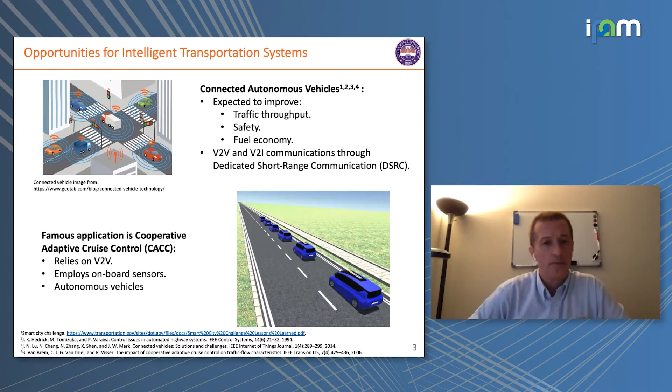What I'm going to talk about today is a little bit different from what we've heard so far, looking at connected vehicles from the point of view of security, and therefore resilience against cyber attacks. We know we have a lot of opportunity with connected and automated vehicles to improve traffic throughput, safety, and fuel economy. But if we forget, we also have potential vulnerabilities associated with the use of connectivity.

We focus mostly in this work on cooperative adaptive cruise control, but some of this activity has been extended by me and some of my colleagues into more general cases for distributed CPS, networked CPS.

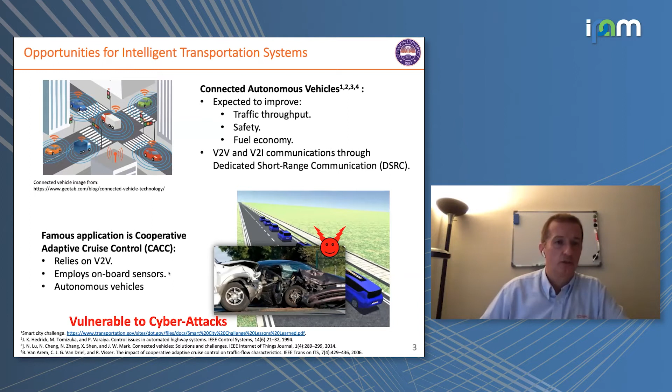There are several V2X applications being studied, for example for road safety: collision warning, collision avoidance, intersection warning; for traffic management: speed management and traffic information routing; infotainment; and also autonomous driving, to really control the vehicle from the point of view of fuel economy, braking, or cooperation with other vehicles to improve overall traffic flow.

Together with those benefits comes a whole set of security issues. There are several types of attacks that can be implemented on a vehicle network. In this work, I mainly focus on the ones associated with availability of the network, in particular jamming and denial of service attacks. In the past I've also done work in integrity and data trust, and you can find that work on my website.

There are sophisticated threats that can be implemented, and the problem is that cars are on the road and have to satisfy certain safety requirements different from other applications, such as in a computer network or an electric grid. People have tried to find solutions using more or less traditional approaches, but there are some key aspects that still need to be nailed down.

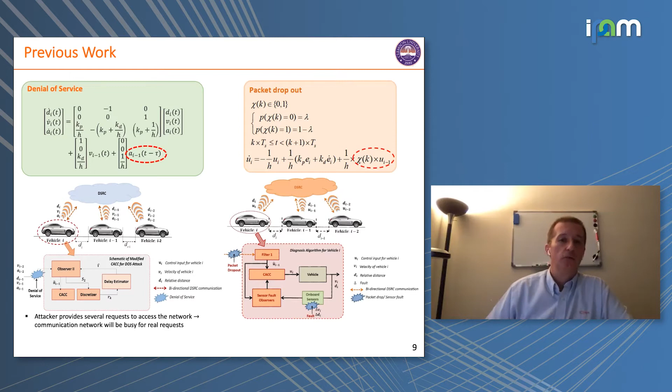For example, for the packet dropout we need the Bernoulli distribution, or we need to be able to estimate the delay in the case of denial of service, which in most cases are difficult to be met. So here, what I'm going to talk about is a different type of approach we have developed that is more sophisticated, utilizing hybrid modeling to address this problem in a more formal way.

I'll start first with the cooperative adaptive cruise control, the traditional approach, and a comparison with ACC.

In ACC, we just use information from the sensors without communication between vehicles. The objective is to maintain a certain relative distance from the vehicle, which depends on the headway timing constant H and initial potential distance R. The idea is to send this error to zero and possibly have a certain condition for string stability.

Now, in the cooperative adaptive cruise control, we have injection of information into the communication network. We are focusing on a particular scheme in which the preceding vehicle sends information to the following vehicle. There are several other schemes out there, but this is the one we mostly focus on, and it's one of the most popular ones.

The information sent in a V2V fashion is this u_{i-1}, the control action of the vehicle in front, sent through the network to the rear vehicle, in such a way that you can improve the control in the vehicle that is following.

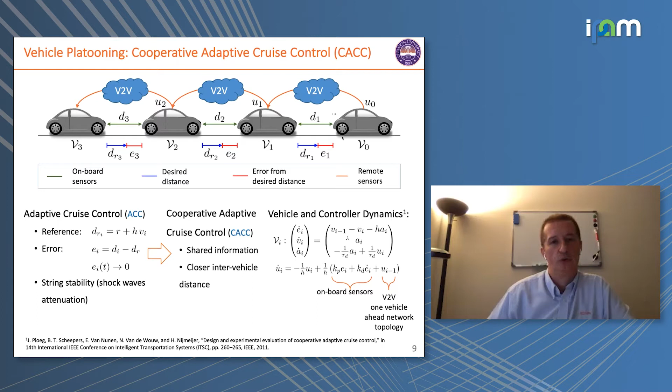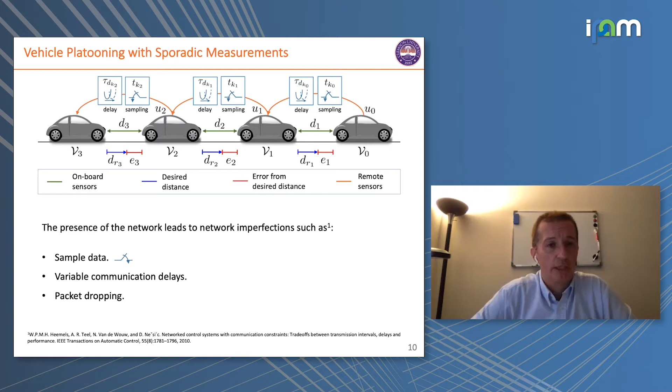Issues arise when we introduce phenomena typical of network communication, such that we can have delays or variable time sampling. This really makes things challenging, and the question is how can we deal with this phenomena in our model?

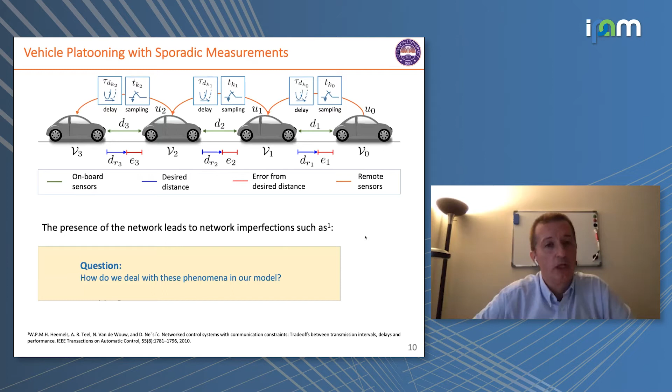Here is the way we model the problem. We make some assumptions on the variable transmission interval, bounded by the maximum allowed transmission interval, TMATI, and the network delay, also bounded by TMATI and the maximum network delay, TMAD. This ensures that the output is received by the controller before the next sample is sent.

What we basically do is model the system such that the whole platoon is considered as a cascade of dynamical systems. We want to design things such that we have both performance of each vehicle independently and also string stability.

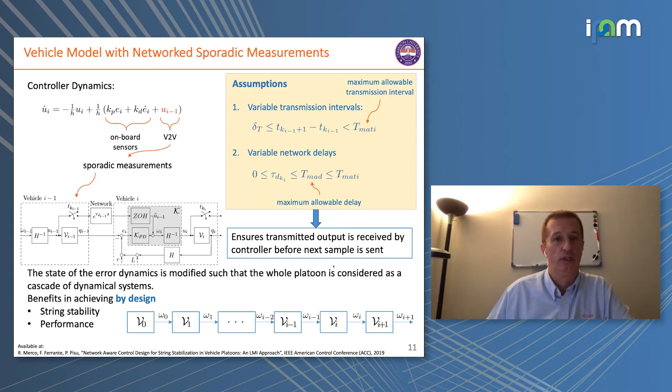So here is what happens: at a certain time step, say T0, the control input of the leader vehicle is sampled and a packet is created. The packet is then sent to the network, which has delays, and is received by the following vehicle, which updates the value stored in the zero order hold block. The system can then be represented as a linear system with jumps.

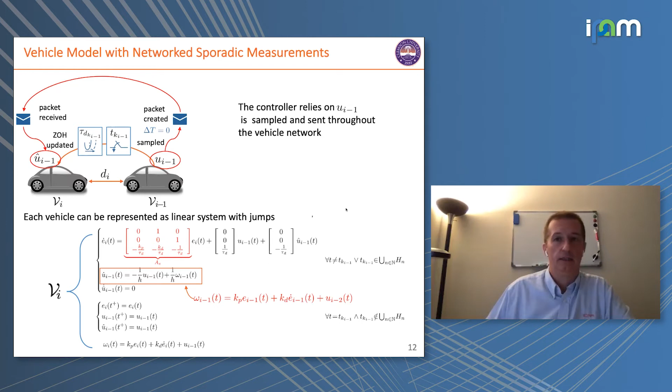It is clearly amenable to being described as a hybrid model.

In particular, we follow a hybrid system framework proposed previously by Goebel, Sanfelice, and Teel. We enlarged the state space with auxiliary variables subject to a reset, introducing variables s_u and L, and a network trigger time tau.

When the information is sampled and the packet is created, the variable s_u now stores the new value. That value is sent through the network, and after some delay it is received on the receiver side, and the value of the zero order hold is then updated.

The variable L keeps track of whether the next event is a sampling event or an update event.

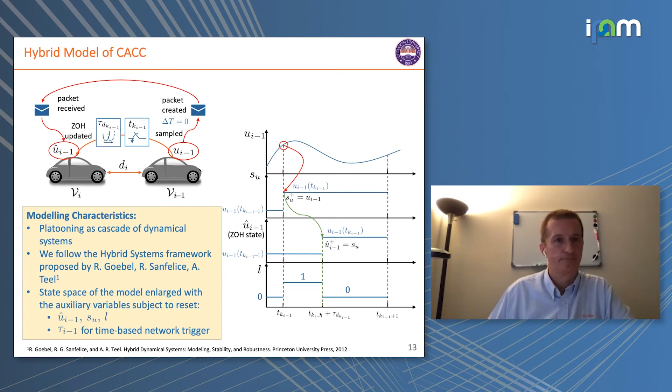We basically introduce a particular way to deal with this. The local parameters that we have to act on are the controller parameters KP and KD, which are the traditional controller parameters of the CACC.

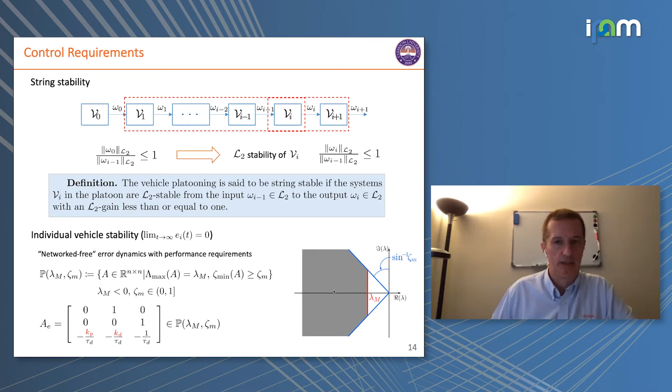So what we are trying to do is to solve the following problem. We have platooning parameters H and tau D, and tau D basically describes a little bit the dynamics of the powertrain of the vehicle in a very simplified way.

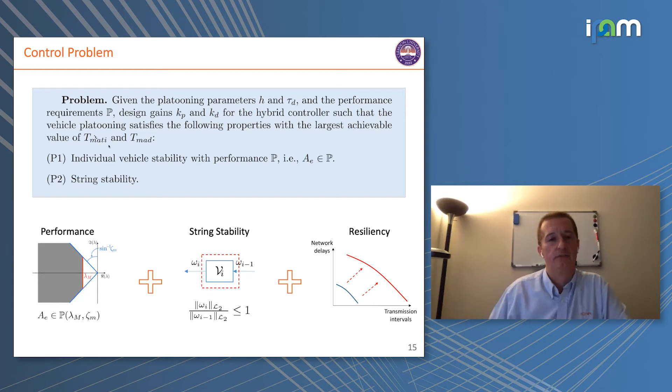And we want to design the parameters KP and KD of the controller in such a way that we satisfy conditions P1 and P2, which are string stability and individual vehicle performance, with the largest possible delays and intersampling. So that's basically the idea.

So what we did in our design approach, we have sufficient conditions for string stability, and that allows us to estimate the trade-off curve, combined with a necessary and sufficient condition on the controller gain to satisfy the performance requirement. And what we came up with was a tuning algorithm, which is a more computationally efficient algorithm to solve this problem than the existing ones.

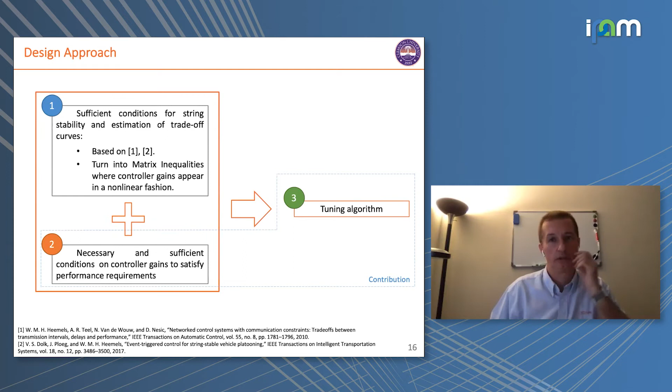So in order to solve the string stability problem, we develop sufficient conditions that are expressed basically by solving this LMI. Now, the problem that we have here is that this LMI is nonlinear in the controller gain, which are embedded in the A11 matrix. And the gamma parameter is the parameter such that the smaller the gamma, the higher will be the delay and the transmission interval that we can handle.

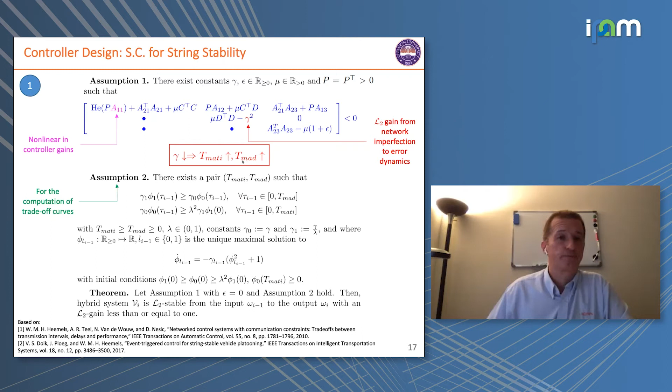So the way that we address this was to take advantage of the particular structure of our system, and in particular the two conditions that we have, condition C1 and condition C2, which basically allow us to express KD as a function of KP through the characteristic polynomial of the system, and to define a range for KP.

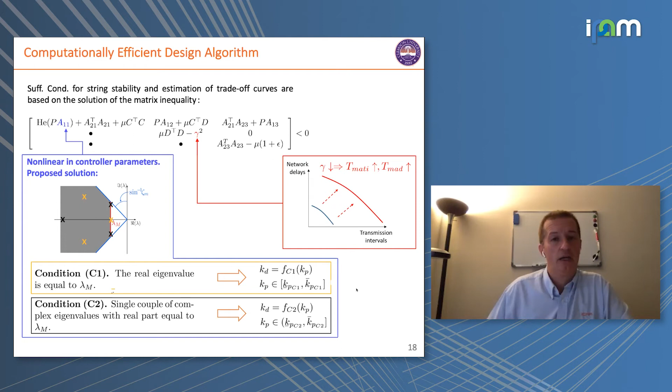And with this, we developed basically a solution for finding this necessary and sufficient condition. And we have performance constrained by the powertrain time constant. So lambda m cannot be as small as I like, but there are some constraints there.

And we have the relationship between KD and KP, which allows us to reduce the number of variables that we need to use in the solution of the LMI, because now we have a relationship between KP and KD. So instead of having a problem that has 2 degrees of freedom, now we have only 1 degree of freedom.

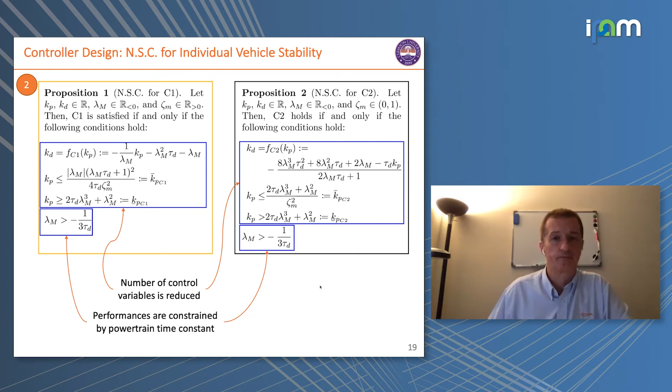So the problem that we basically solve is to minimize gamma, subject to this matrix inequality and this performance matrix. And what we do is an algorithm that looks at both cases, case 1 and case 2, and finds, by gridding, the minimum KP such that gamma is minimum, and then we compare the two values of gamma and select the KP accordingly. Then from the relationship between KD and KP, we can also find KD.

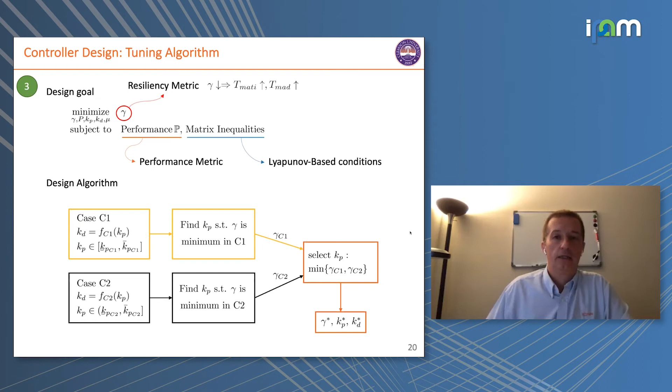The Ploeg algorithm, so here we did the simulation at the top point, where we have 150 milliseconds, both of transmission delay, network delay, and transmission interval. In that case, we can see that the system from Ploeg will not be string stable, but our system is, and it behaves very nicely.

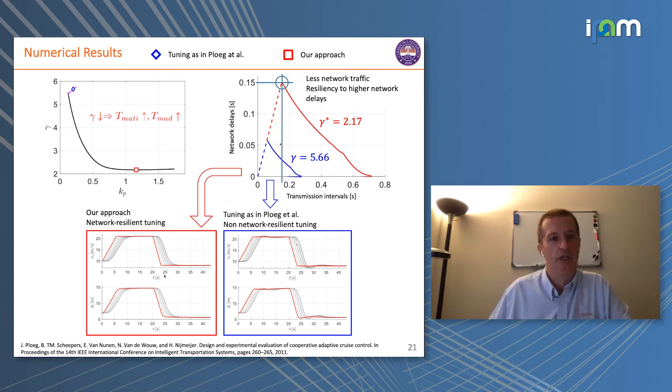In the next slide, I have a way to show this in a simulation. If you look at the red ones, those have the new system, new controller, and the ones in blue are the classic one. You can see now when the system is going to brake, we have a very nice smooth behavior for the red case, while the blue ones are oscillating, so it doesn't have a very stable behavior.

Now the next step would be, how do we deal with the denial of service attack? The effect of denial of service attack in this case is potentially creating a disruption in the communication.

We have some assumptions that we have introduced. We have potentially radio jamming that can be performed by an attacker in an unknown way, so there is not a known strategy for it. But there are energy and geographic constraints. So the attack has to happen in a limited region, as is reasonable since the vehicles are moving, and therefore when they come into the range of the attacker they may be under attack, but then they drive away from the region, and the system will be restored to the original status.

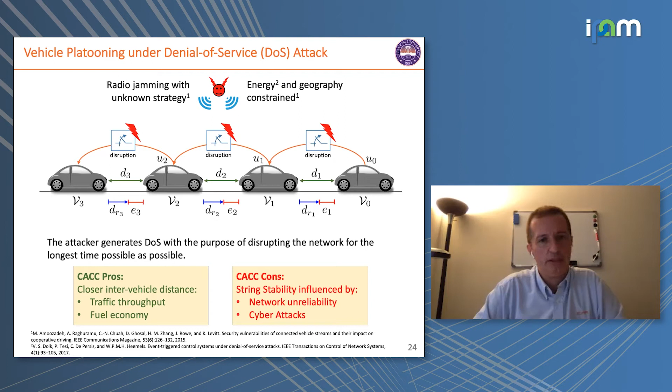So there are issues that we need to address in terms of string stability in the presence of this attack. Here is a comparison between ACC and a standard CACC approach trying to have a fail-safe mechanism when there is an interruption in communication, for example, to switch to standard ACC.

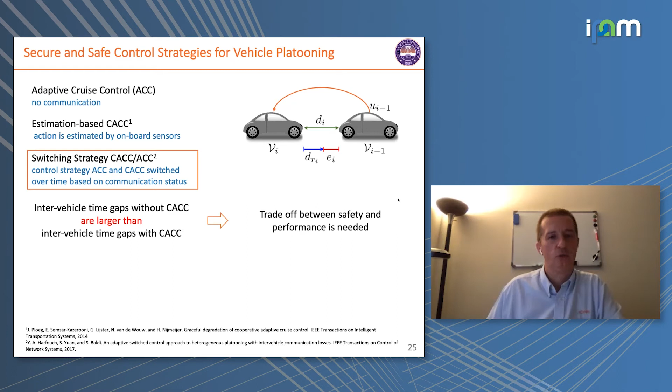But what we have here is that when we have a cooperative adaptive cruise control platooning, the inter-vehicle time gaps are much smaller than, for example, ACC. So there is always potential issues in terms of safety, that when you're trying to switch, you may be too close and the system may not be able to react quickly enough to avoid collision.

So here we have two research questions that we're trying to address. First, what network unreliability and DOS attack can we tolerate without the need of a fallback strategy? And how do we design the CACC in such a way to maximize the network resiliency under this attack?

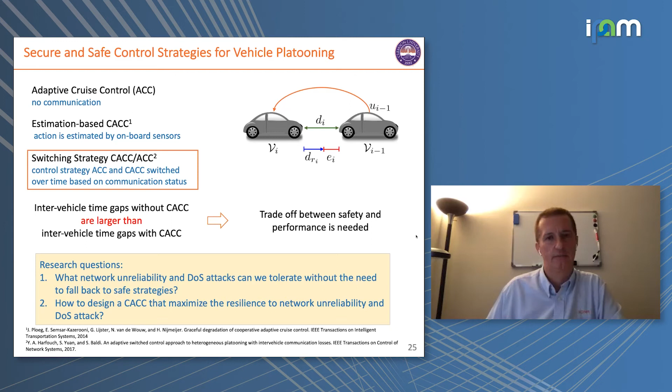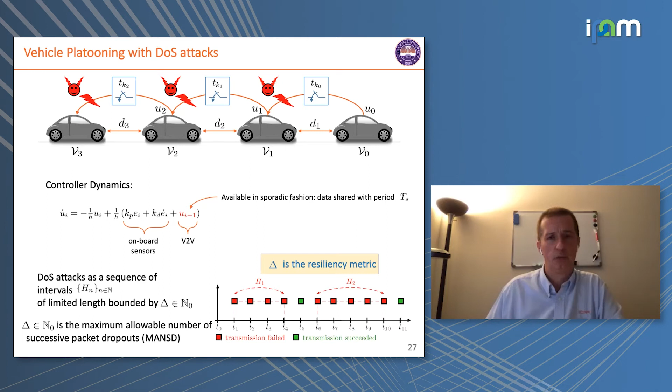Here is the structure of the system. Now we are looking at it with no delay in this case, but we look at having intermittent communication. So basically you can have failure in transmission as represented by this picture at the bottom. And delta is our resilience metric, basically the maximum allowable number of successive packet dropouts that we are able to handle without having stability issues in the system.

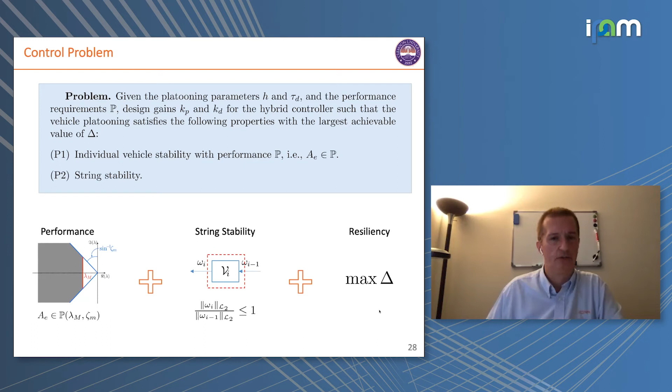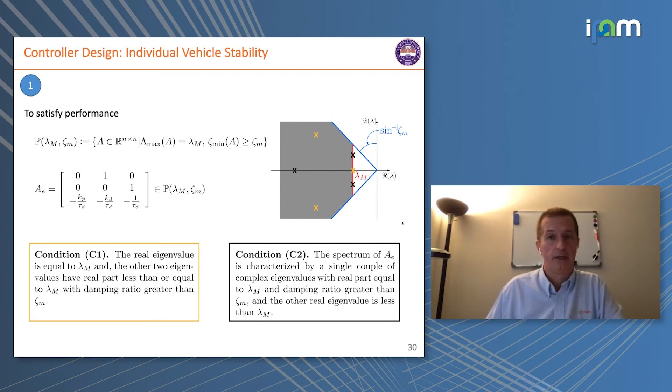So the way we solve this problem, we formulate it in a similar way to the problem we saw before, but now the objective is to maximize this delta. We have a similar procedure to the one we did before: two conditions, either fixing the real part of one eigenvalue to lambda m and the other two complex conjugate, or condition 2 where we have two complex conjugate eigenvalues at lambda m and the other one inside the gray area. In this case we need to solve a slightly different LMI.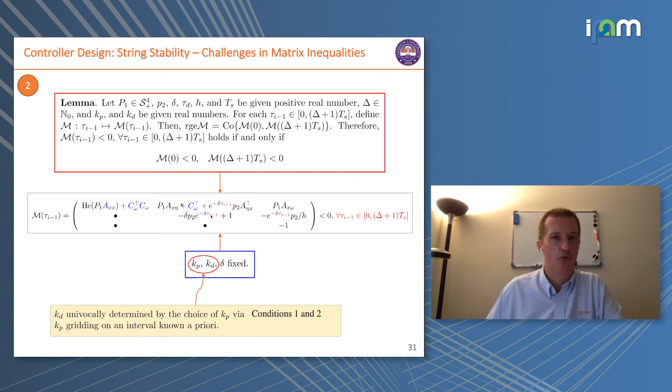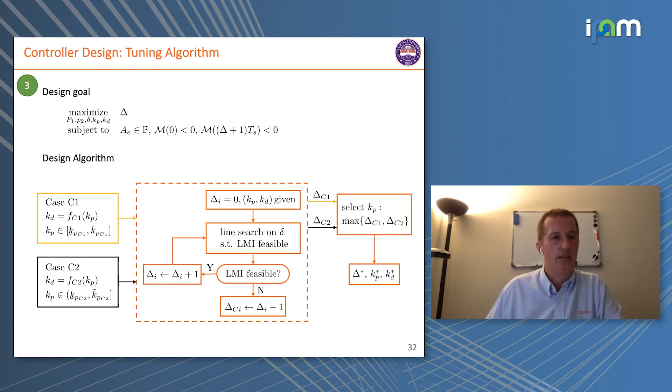Again, we utilize the constraints from KD and KP to reduce the number of variables. The problem is again non-linear, but once we grid with respect to, for example, KP, the problem becomes manageable using conventional tools. So what we do then is solve this problem with these different LMI conditions.

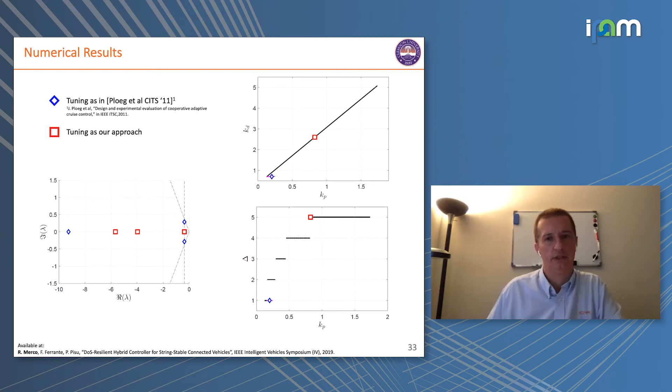So that's kind of the results. And again, I have another video here that shows clearly what happens in the system. Focus on the blue one, and you will see what happens when the dropping happens. The system that is deployed is the blue one, and the red one is the one with the new strategy. You will see that the red one behaved very nicely, but the blue one almost looks like it's crashing against the vehicle in front.

Really, the behavior of the system clearly shows some kind of instability. And if you have a much larger number of vehicles, definitely you will have a crash.

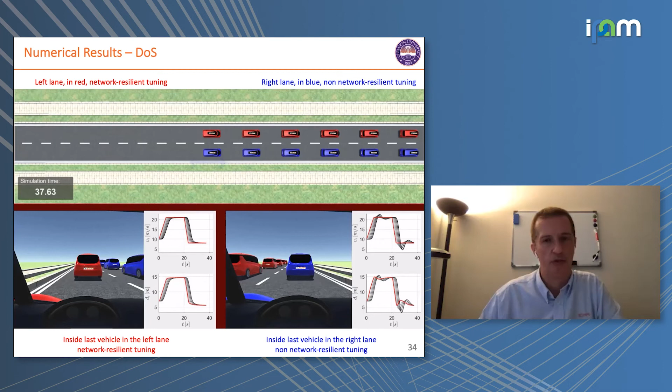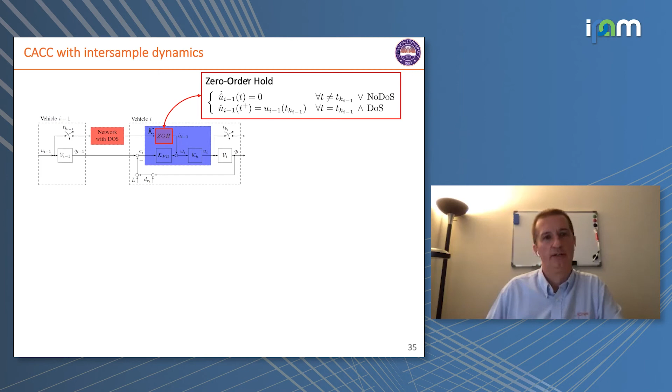Okay, so until now we have made the assumption that we have a holding device at the controller, which is this zero order hold device. But now the question that can come up is, since we have this loss of samples, what if we replace this zero order hold device with a more general device, which has some inter-sample dynamics? Will we be able to improve further on the previous results?

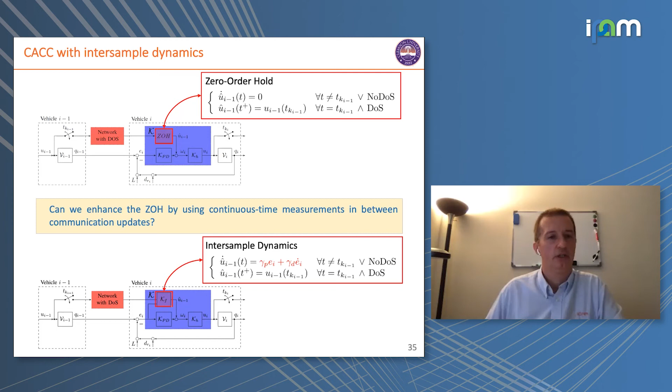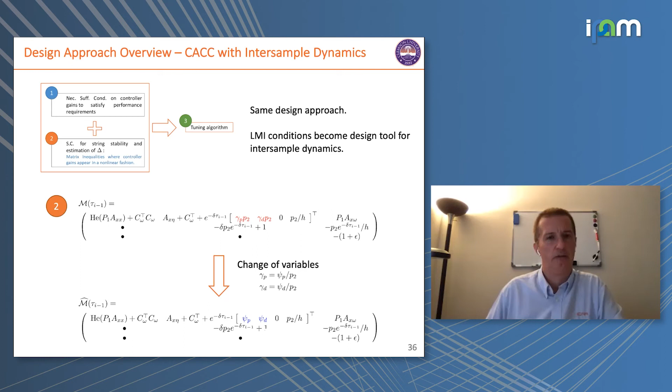So what we did is we introduced inter-sample dynamics in a more general form, and that results in a change in the LMI that we have to solve, but we can still handle it.

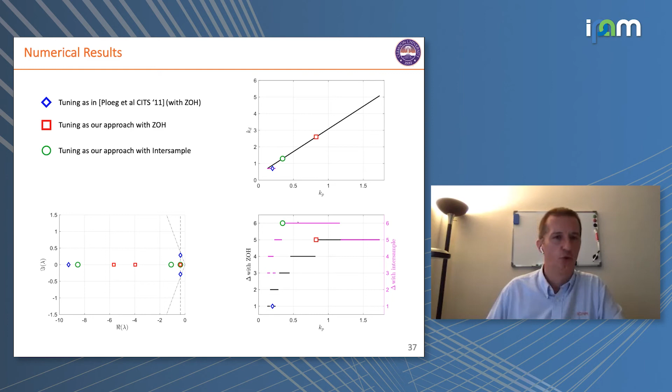And by looking at what we have now with the new inter-sample approach, we get one extra sample, so basically we can handle 6, in this case, packet droppings in a row, one more than the previous controller. So it's a small improvement, but yes, there is potentially an improvement in doing that.

So we also did a comparison using different time gaps, and what we did see is that, generally speaking, the inter-sample approach always guarantees higher resilience than the zero order hold.

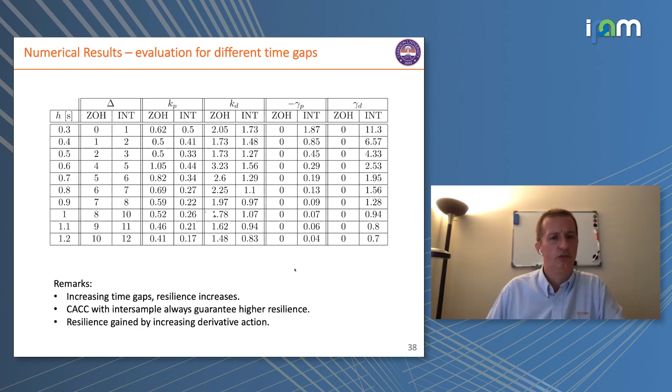So that was looking at DOS causing packet dropping, but DOS can also cause combined phenomena. The denial of service attack can not only cause packet dropping, but it can also cause delay. So we needed to consider the effect of delay and how much delay we can tolerate before things break down.

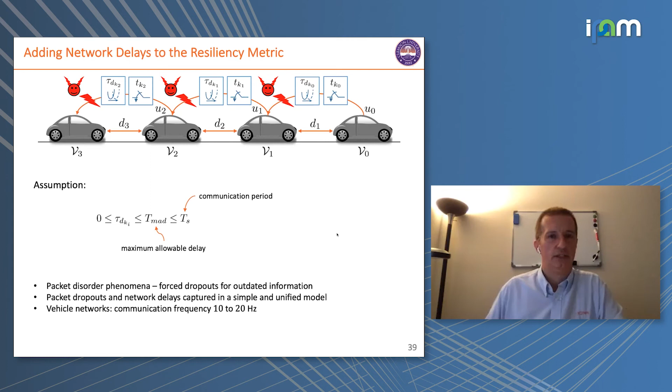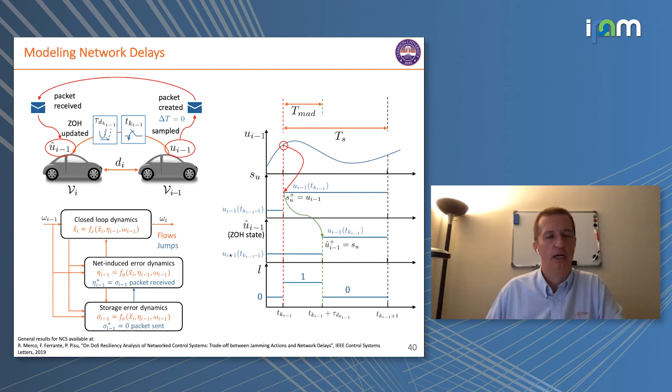And so that's what we did in this next work. We then reformulated the problem a little bit because we had to deal with the delay, combining the previous two works together.

Now the problem was to find a new Lyapunov function that would allow us to find a sufficient condition for the solution to the problem. Of course, we have to have a decrease at the jumps and also a decrease while flowing. We were able to solve this problem in a similar fashion once we found the correct Lyapunov function.

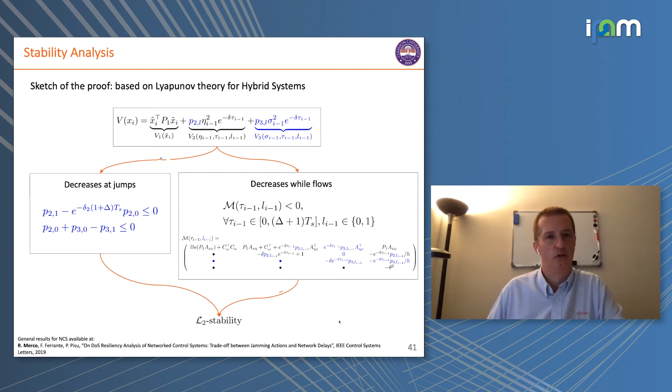And that was the result that we got. So, here we have Ploeg, which is able to tolerate zero packet droppings with a certain amount of delay, while our strategy is able to handle the same amount of delay, but a larger number of packet droppings at the same time.

And if we replace the zero order hold with the inter-sample device, we get an additional packet dropping that we can tolerate. This provides an idea of how things can be designed in such a way that we can guarantee further robustness. Notice that we didn't make any sophisticated changes to the controller itself. Really, we just retuned the gain of the controller in such a way that we improve the overall performance of the system.

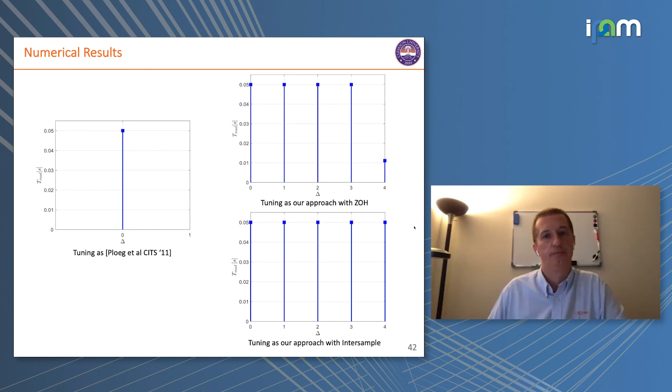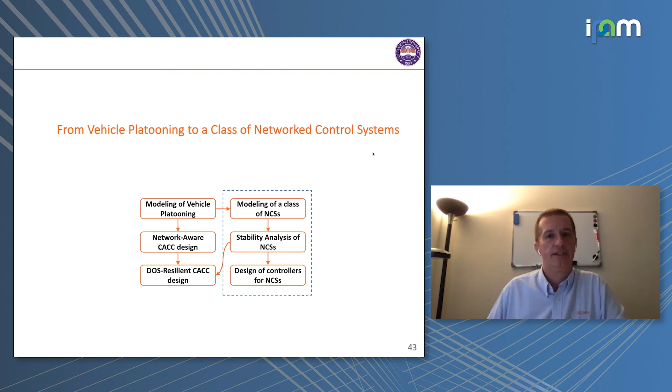Okay, then what we did is we went from this particular application, vehicle platooning, to a whole new set of applications, a more general class of systems, which is networked control systems. Basically, we made an analogy between what we had in our vehicle model and a more generic network control problem.

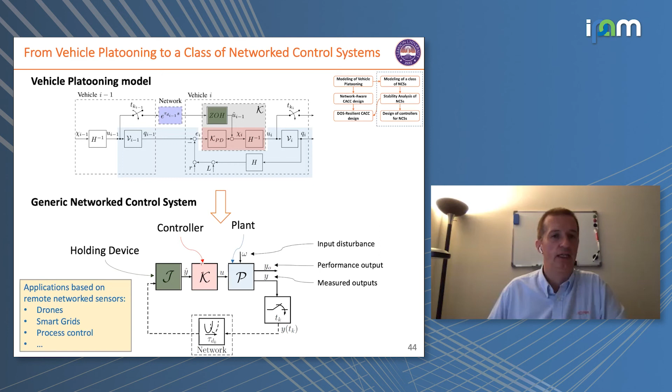And here, what we look at is a more general problem in which we want to design a controller and design a holding device in such a way that we have guaranteed performance under network delay and variable transmission.

Here what we look at is basically designing an output feedback controller, and utilizing a holding device in order to deal with the problem.

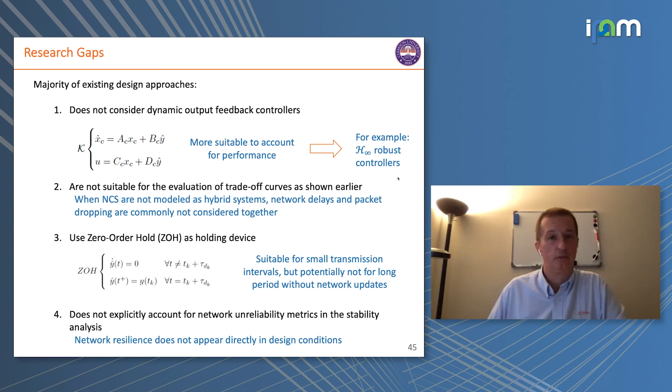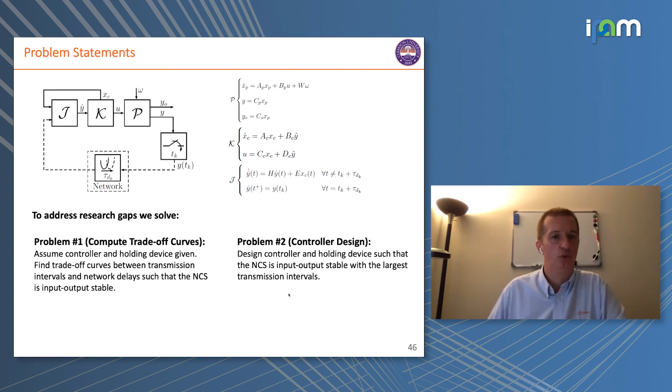What we had is we first divided the problem into two parts. Part number one, we look at computing some trade-off curves. So we assume that we have a controller and holding device, and can we find what are the trade-off curves between the transmission interval and the network delay, such that the system is input to output stable. And then we work on a control design problem in which we have a co-design of controller and holding device such that the system is input to output stable with the largest possible transmission interval.

So there are some challenges that we have to address to solve this problem. Of course, we have, first of all, to find a good Lyapunov function in order to solve the problem, which is a clock-dependent Lyapunov function, because we are trying to model the system as a hybrid dynamical system. And we need to be able to guarantee decrease during flow and decrease at jumps.

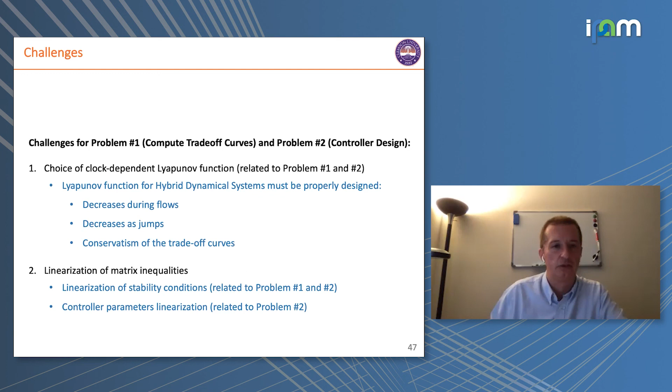And we have to deal with the conservatism of the trade-off curves. And what we find is, of course, the problem then becomes a problem to be solved in some kind of linearization of matrix inequality. And we need to find basically stability conditions and control parameters for this.

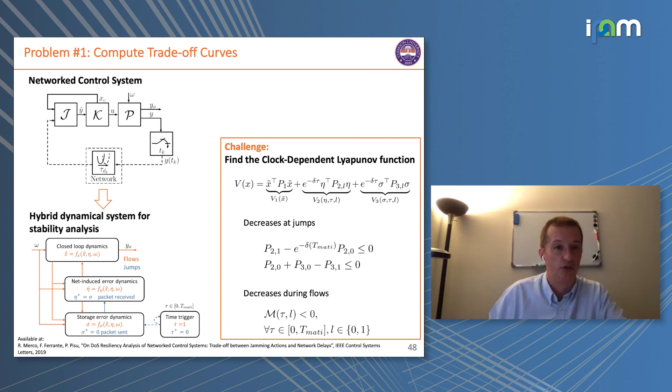Here is the way that we model the system in the case of computing this trade-off curve. So we have storage dynamics, and we have this time trigger that keeps track of the transmission, variable transmission delay, variable transmissions. And what we did is we found a Lyapunov function suitable to describe the problem and to solve it, basically conditioned on a sufficient condition for having a decrease at the jumps and a decrease during flow.

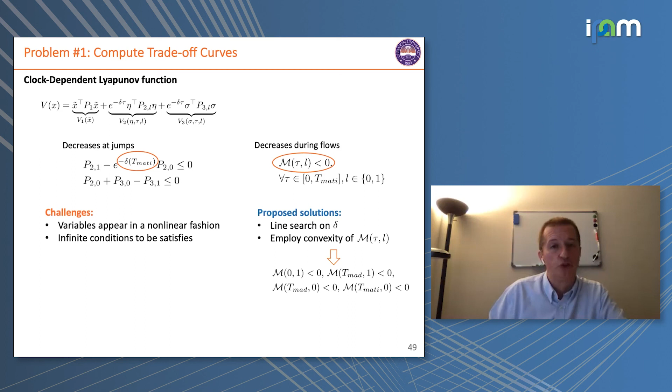So the proposed solution, basically, in this case, is conducting a line search over this parameter delta and exploiting some convexity condition on the matrix inequality.

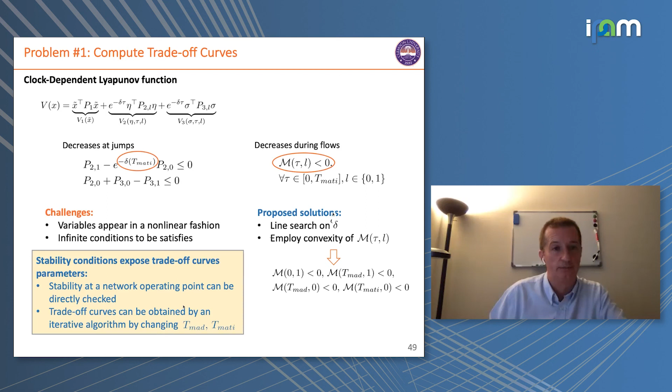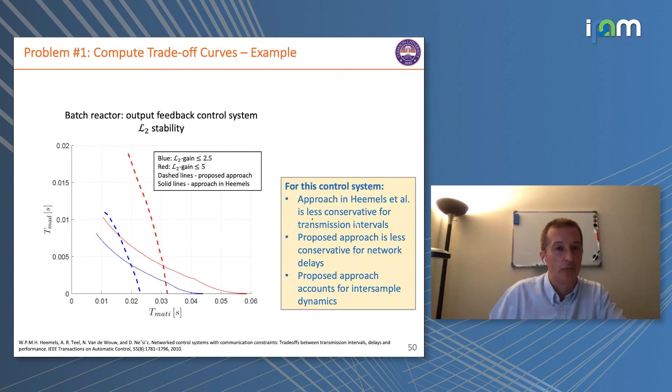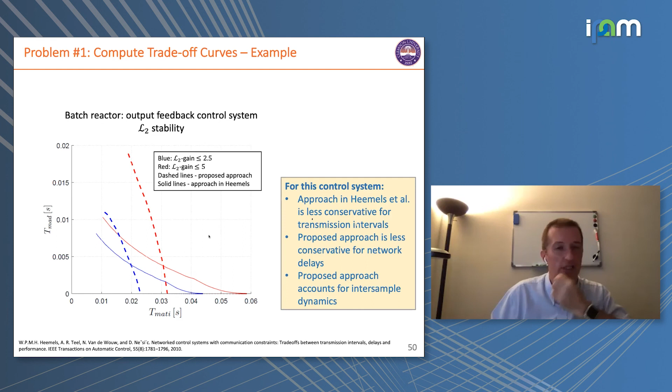So basically we have the same problem that was solved by Heemels et al., and it shows that their approach provides less conservatism in terms of transmission intervals. So with their approach, they're able to handle larger... Our proposed approach is instead able to handle larger delays. And our approach also can account for intersample dynamics.

The other problem that we have been addressing then is the one of co-design. So can we now co-design K and J, the controller and the intersampler, in such a way that we have some better property for the system in terms of being able to have the maximum possible, for example, delay that we can sustain the system.

And here again, we model the system using a time trigger and basically a hybrid formulation. And again, the challenge is to find a suitable Lyapunov function that can be used to find the stability condition through matrix inequality that then needs to be solved. And the controller and holding device actually are exploited in such a way that you facilitate the solution of the matrix inequality.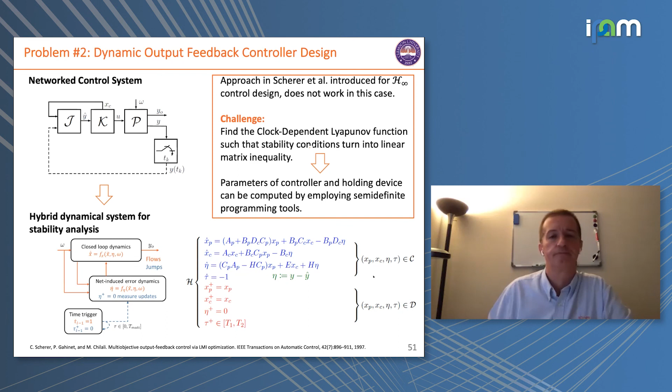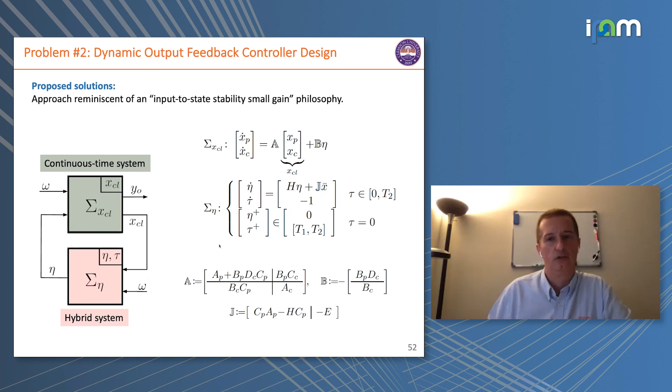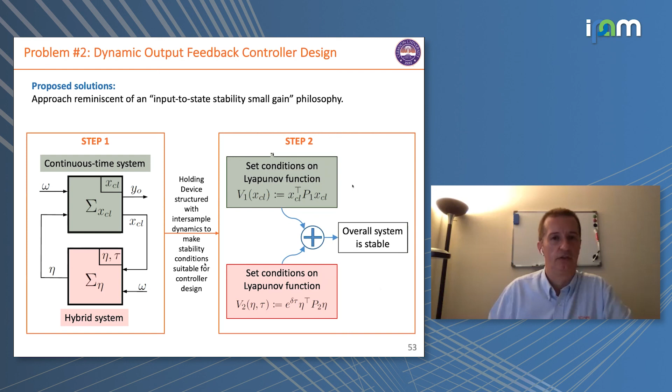So the approach that we have adopted is a kind of reminiscence of input to state stability. And here is basically the way that we look at the system in a closed loop form. And what we did is basically we found a Lyapunov function, which is a combination of V1 and V2, and a condition that guarantees, basically through this Lyapunov function, the overall system to be stable.

And then we apply this to a very simple case. This is just a double integrator, just to see basically what happens, but with delays, and in this case a value of MATI equal to 0.39 is obtained by design.